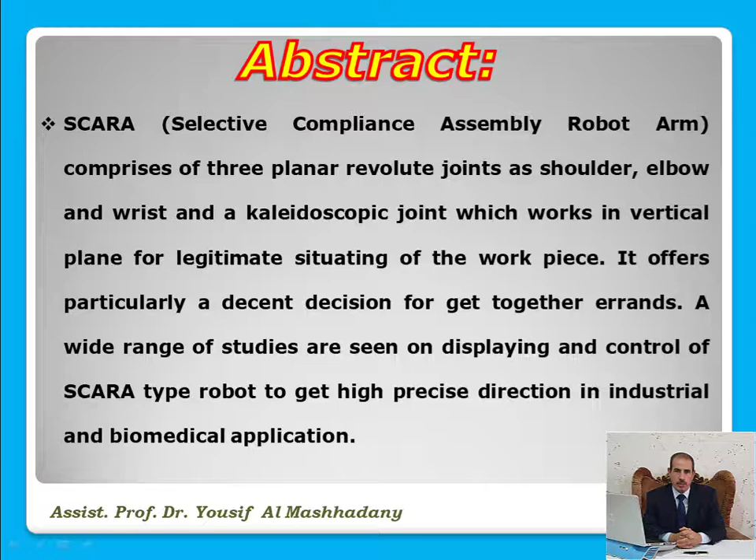The wrist joint works with the gripper in a vertical plane. And this robot has many applications in industrial and biomedical applications. In this work, we apply the linear quadratic Gaussian controller model for controlling the trajectory of the robot.

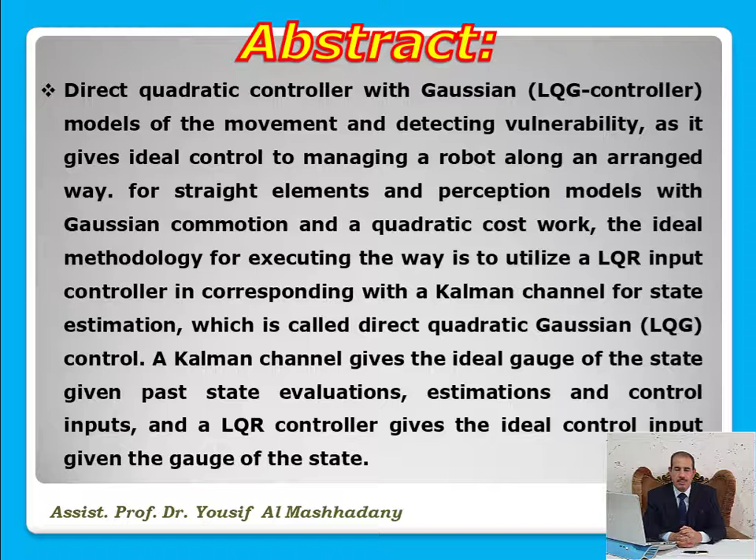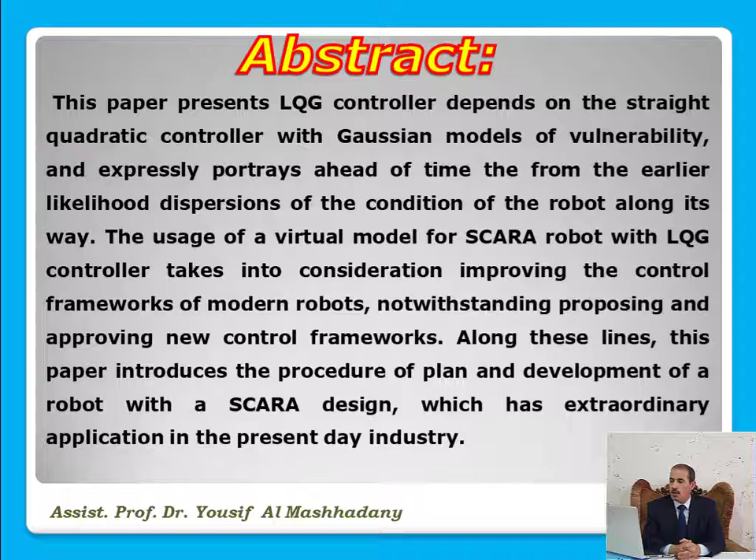This paper used the virtual reality model for the SCARA robot, and this model was built according to the real parameter settings for the robot, such as the speed of the robot, the dimensions of the main robot, and like that. The test of the simulation got high accuracy results with specific real limitations. Therefore, this design has the reliability to implement the robot as a practical robot with different applications.

A basic principle of linear quadratic Gaussian optimal control: we know the linear dynamic system can be described by a mathematical model. The mathematical model for any physical system is very important for preparing the control system, because the first step for building the practical controller is the mathematical model for simulation. Therefore, the linear quadratic Gaussian theory depends on the state space mathematical model.

The state space mathematical model depends on two equations. The first one is the state equation. The second is the output equation. We know this system has four main matrices. The A matrix is the characteristic matrix, B matrix is the input matrix, C matrix is the output matrix, and D is the matrix for the MIMO system. Also, linear quadratic control is prepared for the control signal U.

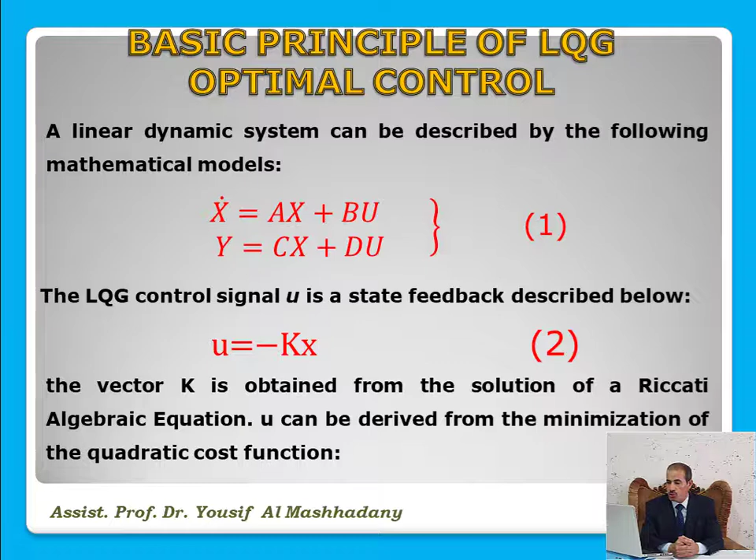This is described by the equation U equals minus Kx. X is the state of the system; the number of states equals the order of the system. K is the state feedback gain. This matrix is calculated in an accurate form to minimize the quadratic cost function. The weight matrix, the general quadratic cost function, can be described by equation 3.

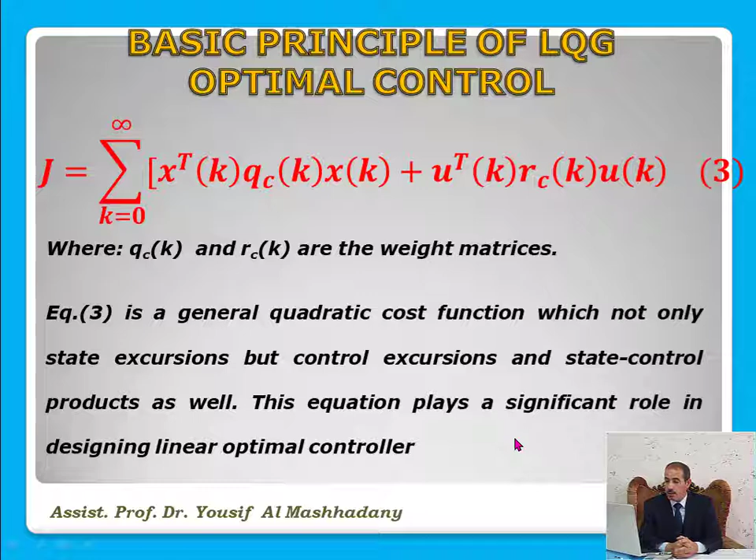This equation is the main equation for preparing the control signal for the robot. Therefore, it consists of the summation of the K matrix. This K matrix is the state feedback gain matrix with state, with input and with the disturbance input, and collects all information for the optimal controller.

The configuration of the linear quadratic Gaussian system consists of two main parts. The first part is the linear quadratic Gaussian controller. This B matrix, K sub G, the Kalman gain. This gain is very important for controlling to get the optimal result with the steady state, and this term prepares the state feedback gain matrix with the main A matrix, the characteristic matrix, and after the combination we get the U signal. This is the output of the controller to send this signal to the robot.

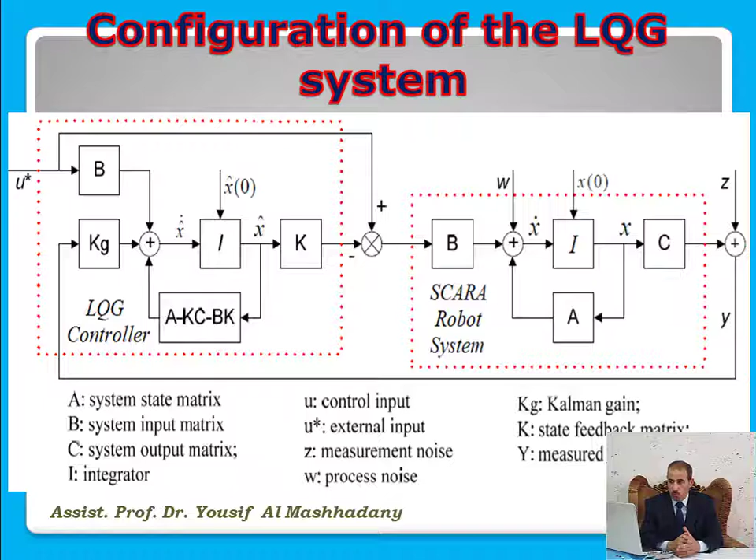The second part of the system is the SCARA robot system. This robot, we know, is described by a mathematical model, a set of differential equations, and we will use the kinematics equations and the dynamic equations to describe the trajectory of the robot.

This slide describes the SCARA robot form. The structure of the robot: a base and three main joints. The first, the shoulder joint, rotates 360 degrees, and the second joint, the elbow joint, like the shoulder joint, rotates 360 degrees, and the third joint has vertical movement, and we can adjust this length to suit the application.

And the fourth joint is for the gripper, and this joint in a practical system is described by sensor-integrated grippers and an ultrasonic sensor for capturing things. Also, this gripper can use capacitive and inductive proximity sensors, and also a force-torque sensor. All these sensors can be used in the gripper according to the application. We can also use the vacuum gripper, which is very important in many applications.

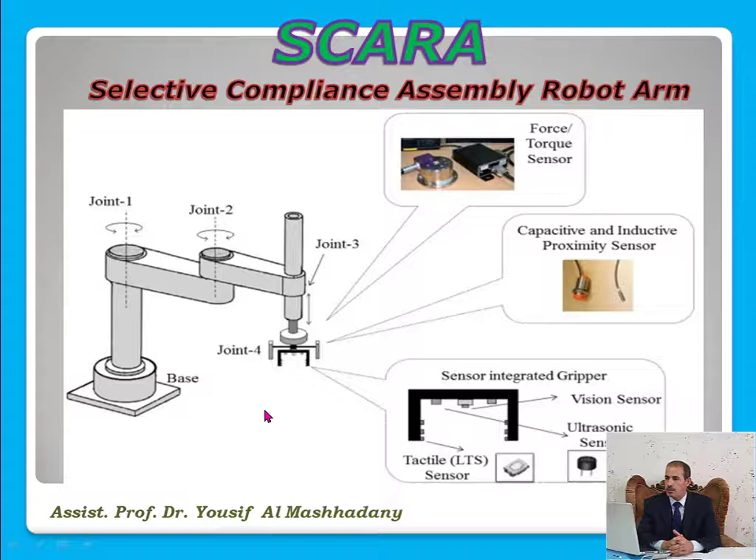Now I'll explain the robot kinematics. We know the DH parameters; these parameters describe the kinematics and how to solve the inverse kinematics to get the joint angles that put the robot in the final posture to arrive at the target with the optimal trajectory. In this structure, we have four main joints, and we have four thetas. One is 0 because this vertical joint doesn't rotate, therefore no angle, but it has displacement. This angle and displacement, because this is for the gripper and this for the shoulder joint and elbow joint.

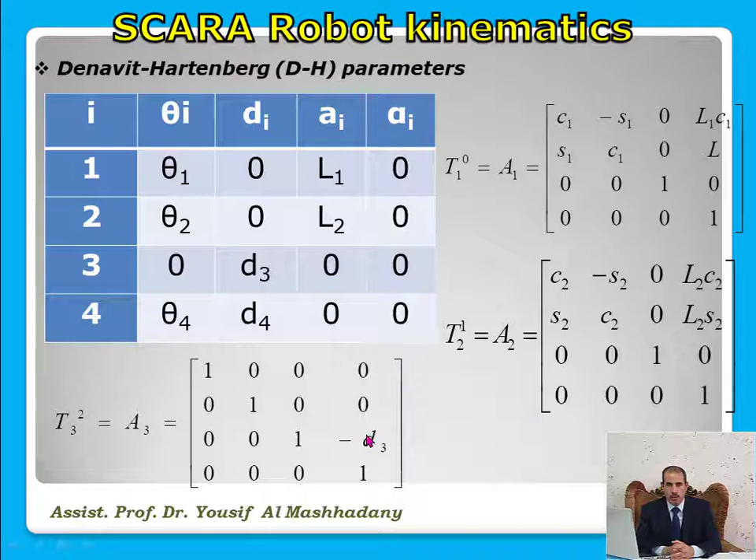This L is the length of the forearm of the joint. Therefore, the transformation matrix from 1 to 0 is A1 for the shoulder joint, consisting of this according to the Euler form, then the second joint, and this for the third. This is just for the parameter D3, and from 4 to 0 is the combination with L and D3 and D4, L1 and L2, and all this.

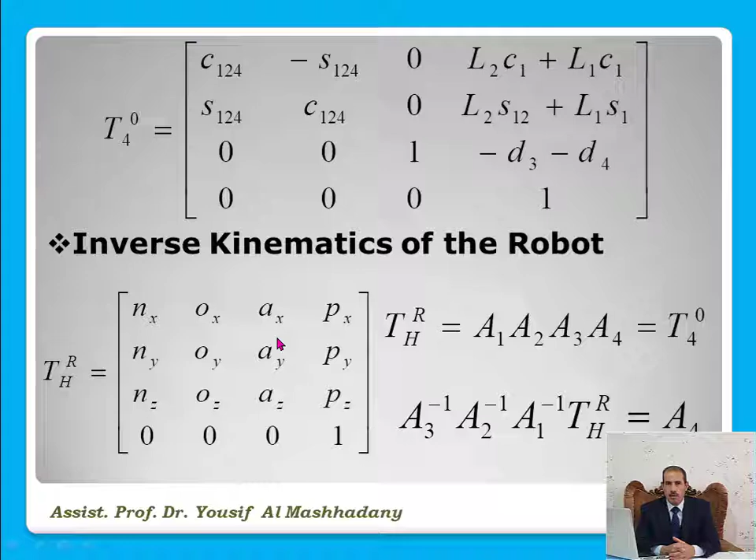The inverse kinematics solution for this robot is by serial multiplication of the transformation matrices A1 to A4 to get the overall transformation matrix to the 0 position. Then when I need the transformation matrix for the end effector, we can get it by taking the inverse matrix of the first three joints multiplied by the transformation matrix from H to R to get the transformation matrix A4. This is for the target position X, Y, Z.

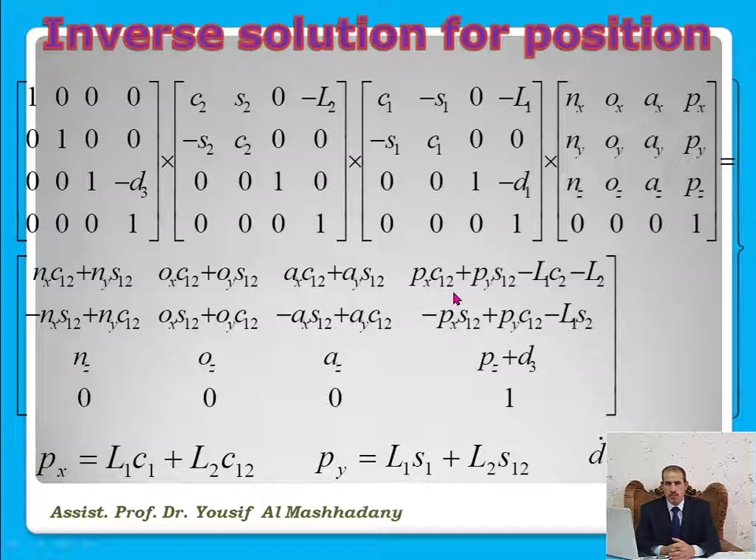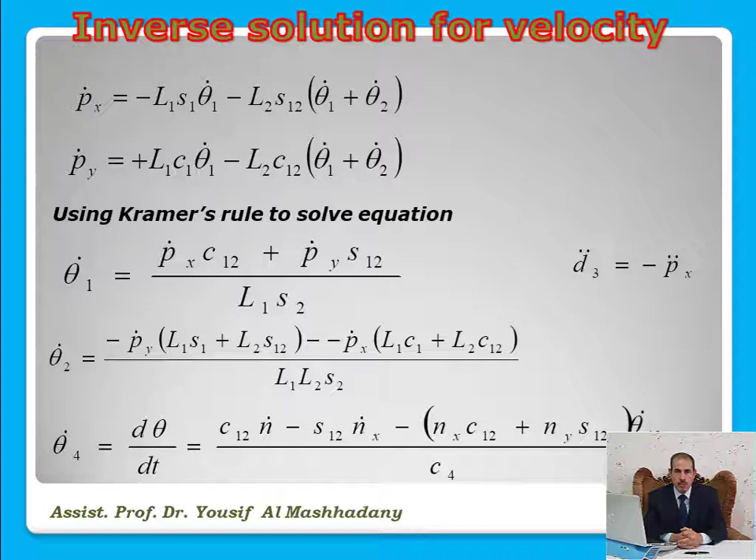Now, by solving the matrix operation, we can get the final form of theta 1, theta 2, D3, and theta 4. Now we solve the velocity. This is used for the velocity equation, using Cramer's rule for solving, and by using this equation we can make a simulation by preparing suitable instructions for the joints and implement the optimal trajectory according to the performance index of the linear quadratic form.

The design of the application of the SCARA robot in this paper is by a virtual reality model. The virtual reality environment is design software within MATLAB to get 3D models for applications. We used this environment to build this SCARA robot lab, because it can do all the applications for the MATLAB movement of the SCARA robot, and many applications. Just change the environment, or make a biomedical application or an industrial application.

Now this is an industrial environment, used for control of factory products, because this is for serial products. We select the damaged product and transfer it to another path. This is the main path of the factory product, and the SCARA robot will get the order to select the limited sample, because this sample is damaged, not a correct product sample. Therefore, it will transfer it to this. This summarizes the jobs done by this robot.

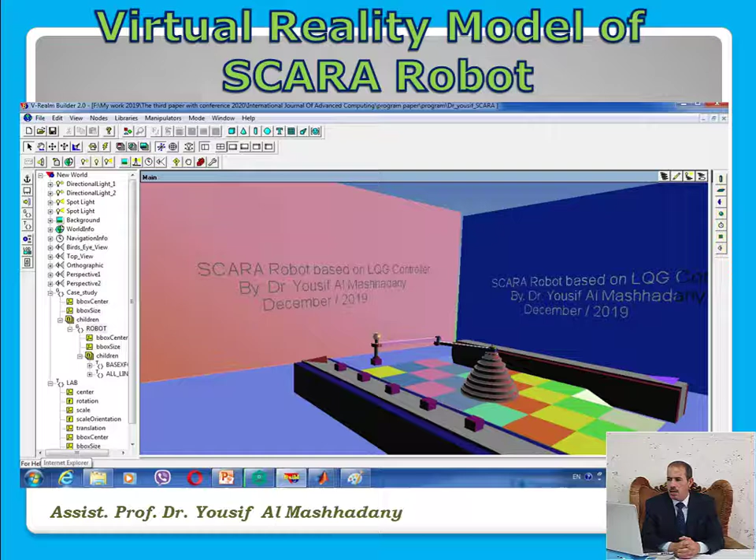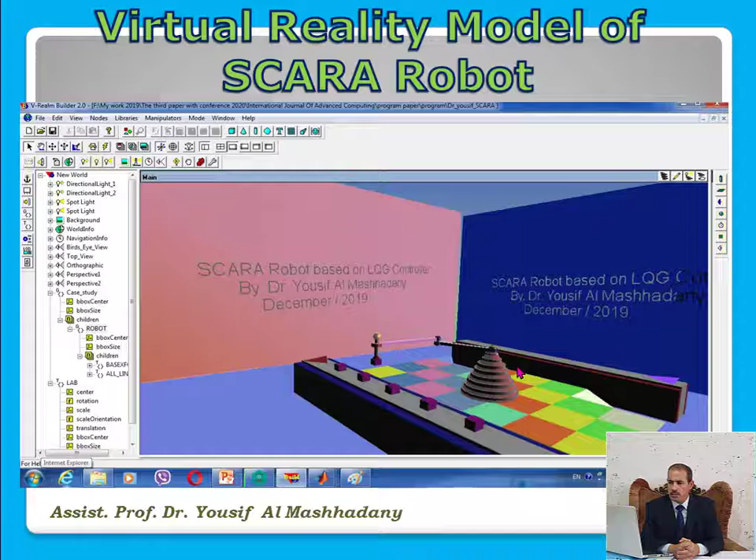This design is built according to the main physical quantities of the SCARA robot: the dimensions, the velocity, the weight; all the parameters are real and practical. The design has three main steps. The first step is the design of the environment lab. By the environment, I mean the envelope of the robot. In this envelope, we have two paths. The first path is the product path, and the second is the path for the damaged product. The robot will transfer the product from this path to this.

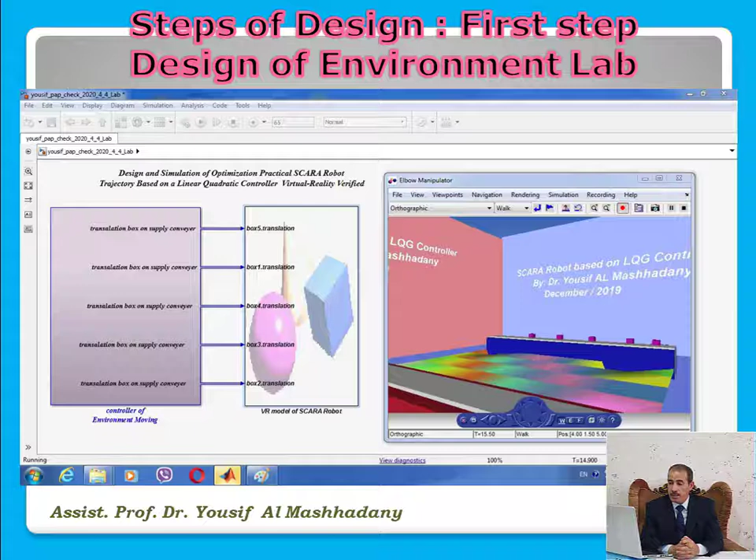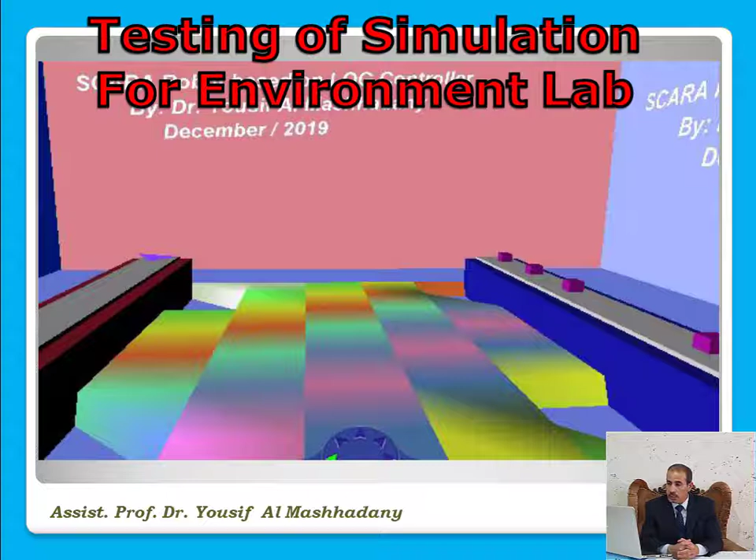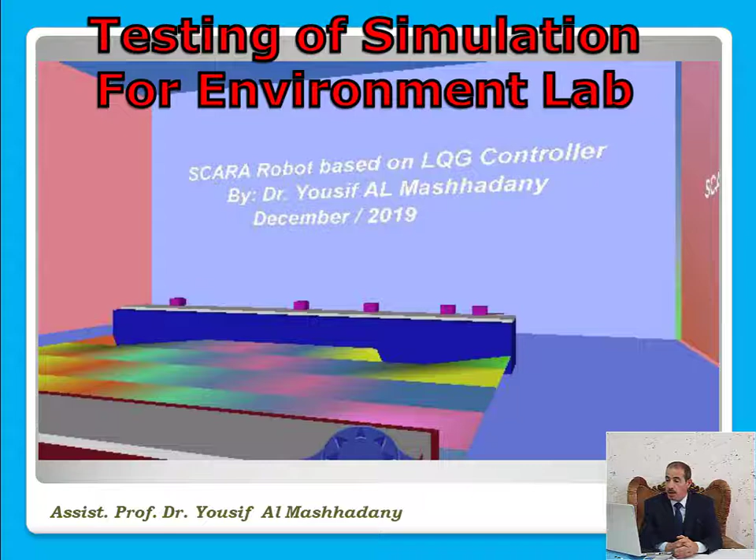First, I made this design in virtual reality, and then tested the simulation of the environment lab to show the movement of the product along this path. We see the product transferring from this side to this side. The main job of the robot is to select the damaged sample from this side to this side by the instruction it gets from the controller, such as a microprocessor, microcontroller or PLC, according to the technique used by the application. Often a microcontroller or PLC is used to implement this application.

After that, the second step is the design of the SCARA robot and preparing the environment for the design of the robot. The robot consists of the base with this form, then the first joint, the shoulder joint, and the elbow joint, and then the third joint and the gripper.

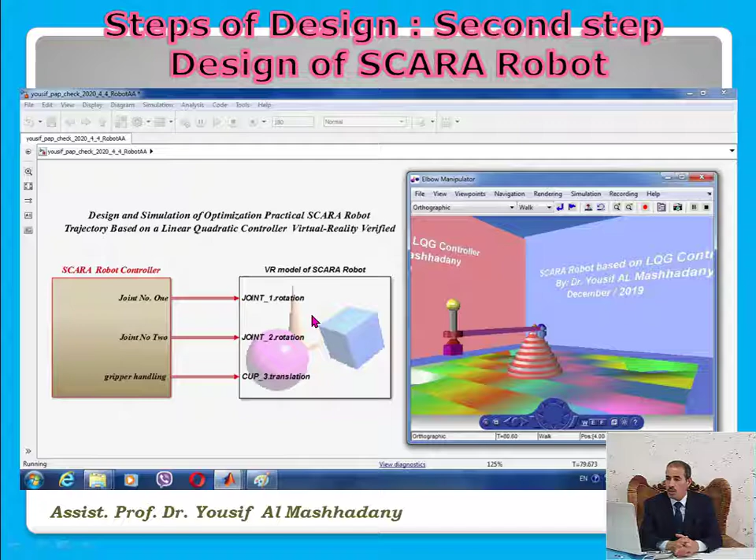This is designed in virtual reality, and the control is designed using a linear quadratic controller to get the optimal trajectory, and the order is calculated here and transferred to the robot. And now we'll make the test simulation. This is the environment called by Simulink, and the instruction is prepared by Simulink and transferred to this form. This explains the

trajectory of the robot. Now this general trajectory is moving 360 degrees. This is the rotation, and the second joint is the rotation, and the third joint has vertical movement, and the gripper is for capturing and releasing the damaged product.

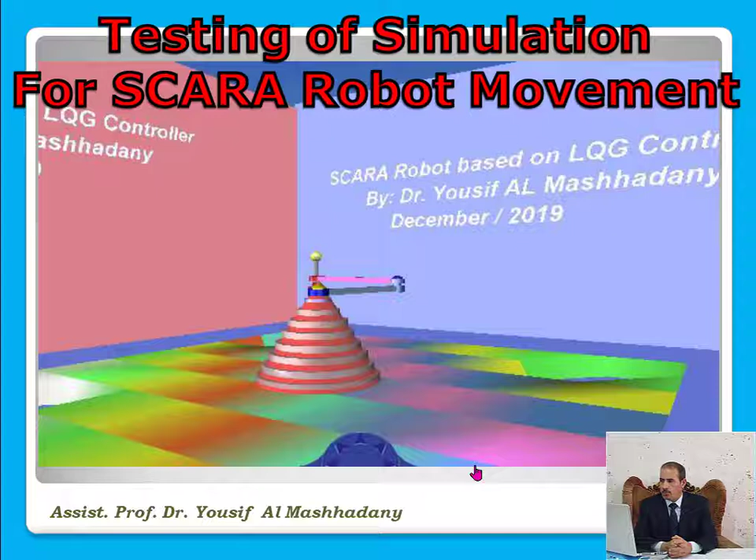This is the top view of the movement of the robot, and we make control for the speed of the robot. The main target is that the accuracy of the robot is very high, and we see this in the final form of the trajectory.

This is with many views. I made the design with 5 views: orthographic view, top view, left side view, front view, and right side view, to describe the model in 3D form with optimal configuration.

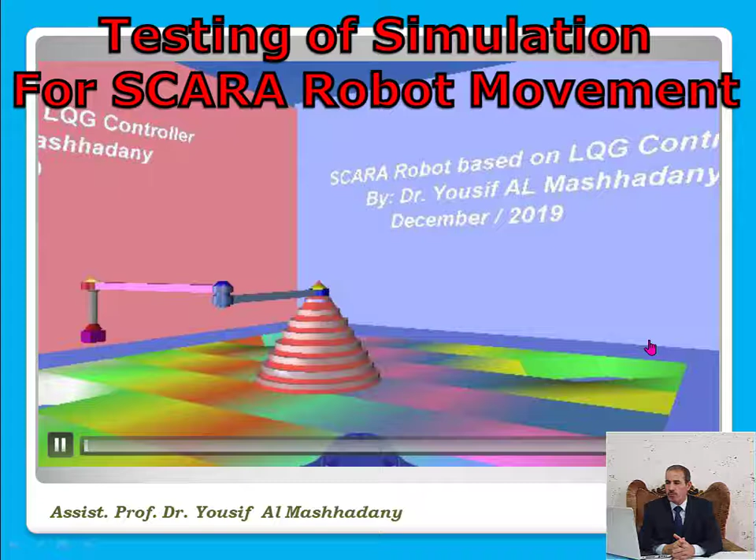Now the final step for the design is the overall design. This is the overall design of the SCARA robot system based on a linear quadratic controller. This is for preparing the environment for the two paths, and this is for the design of the robot using a linear quadratic Gaussian controller to get the optimal trajectory.

After preparing the instructions for the robot, we get three main outputs. The first one is for the shoulder joint, the second for the elbow joint, and this for the third joint and the gripper at the same time. And now we added one item to the environment, the selected box. This is the damaged product, and this is the fine transferred product.

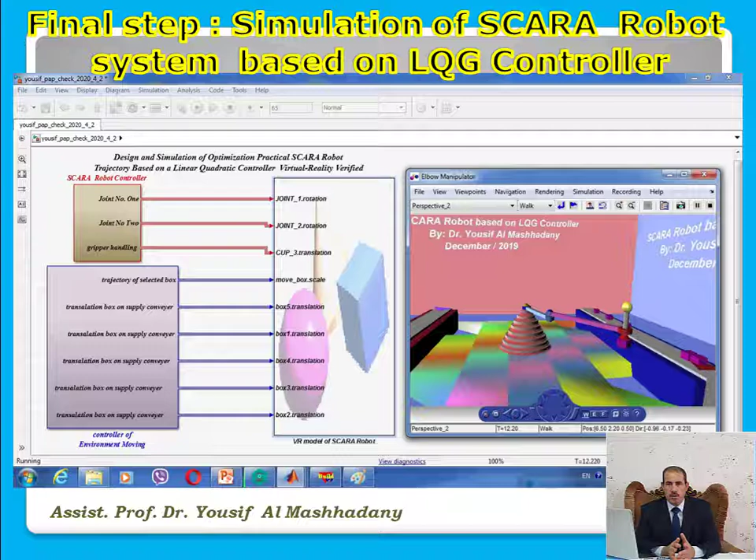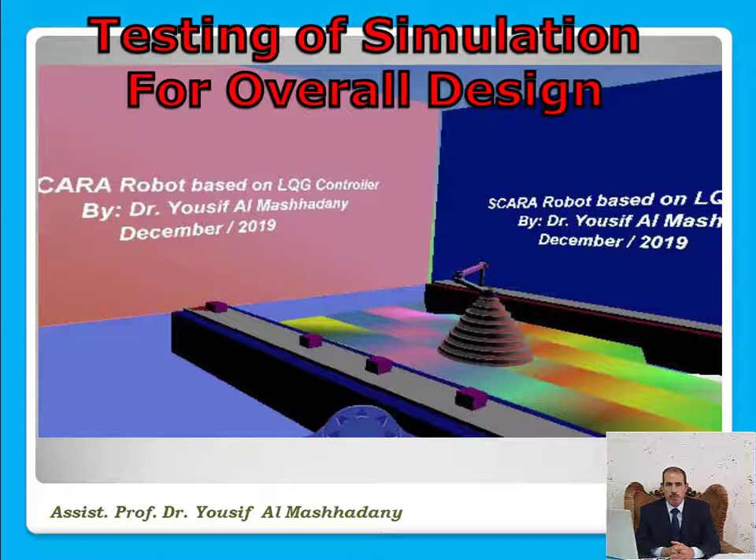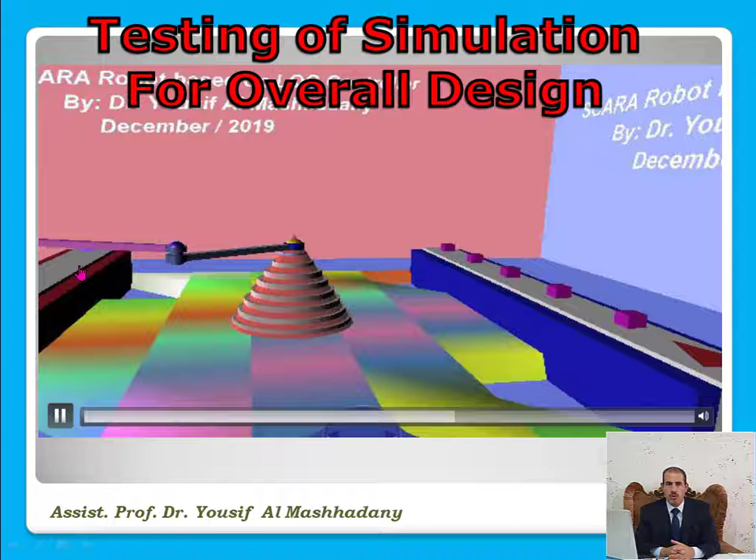And now we can test this environment using MATLAB Simulink. I used MATLAB version 2019b. This is the call of the model from the virtual reality environment using MATLAB to make the test. Now this robot selects the damaged product, this, and transfers it to the second path. This is the top view for selection.

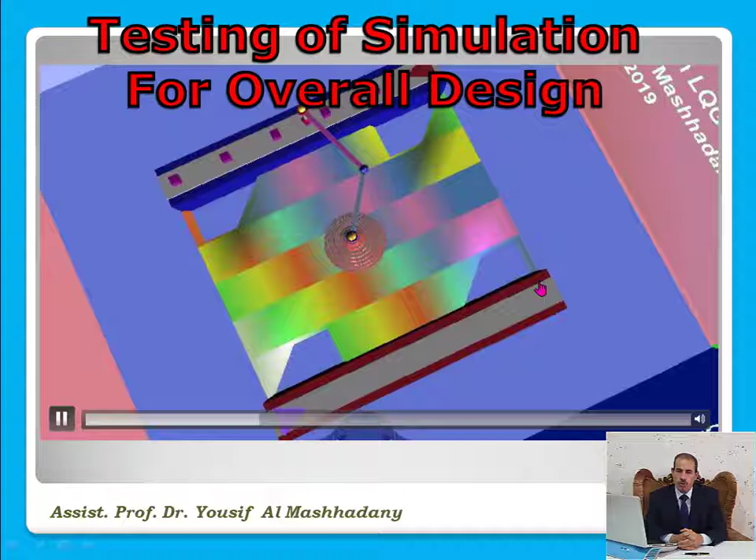We can see the optimal trajectory and very accurate design for the SCARA robot, and I can implement this design in any environment, such as a biomedical environment or industrial environment, and also can modify this control with another form. I will explain this in the conclusion.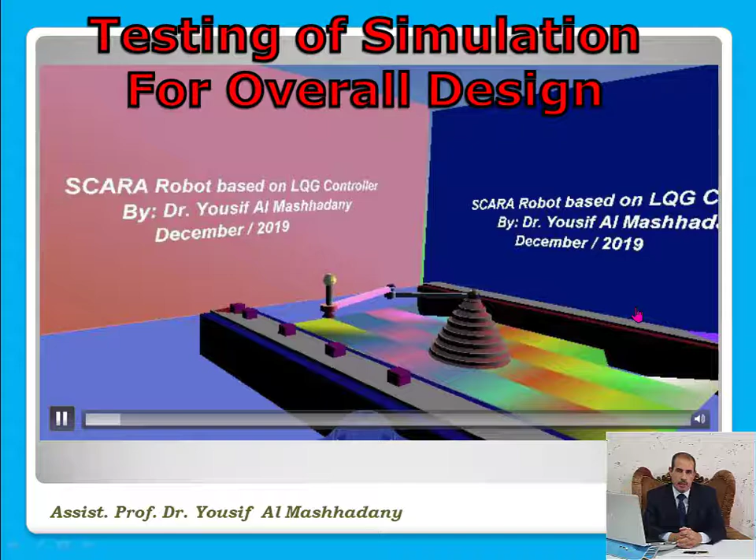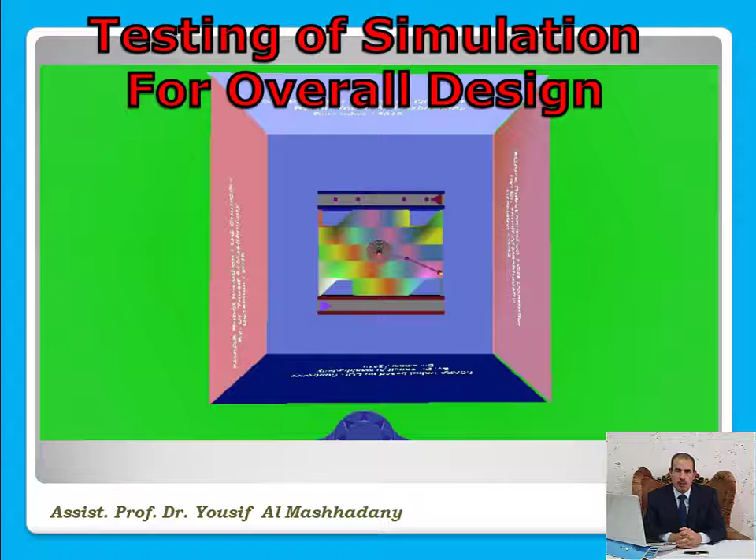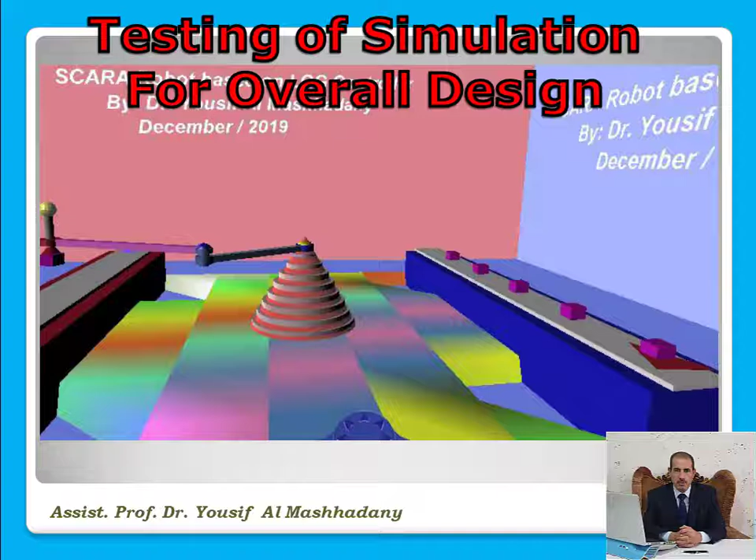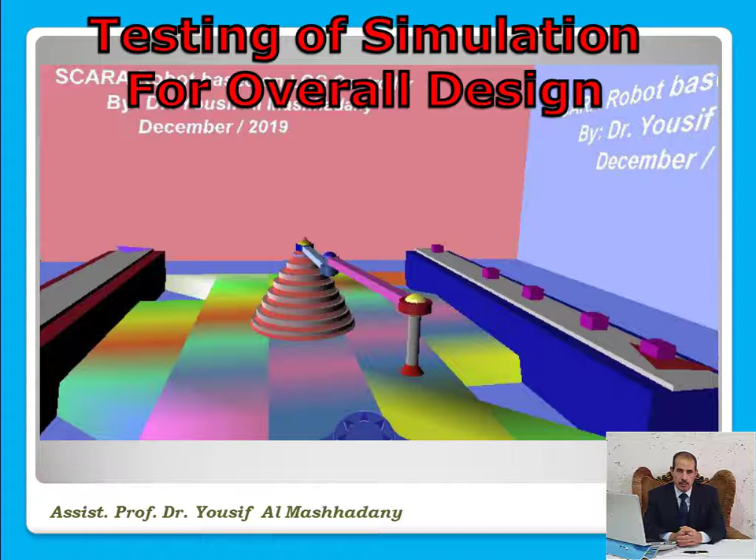Also, we can see the high accuracy in selecting, waiting for the second order, and transferring the sample with high accuracy, because applications such as industrial or biomedical applications need a very accurate design. By this work, I get high accuracy for the design, and we can implement it as a practical model.

Finally, the conclusion for this work: using the linear quadratic Gaussian controller gives a very accurate result, and we can get an optimal trajectory, and this optimal trajectory can be used with industrial robot applications, biomedical applications, or any type of application we need.

Also, the test results have suitable speed, suitable estimation of location, and an optimal control law, because the output has acceptable values for the time response in steady state and transient, because in the classical control tests, such as maximum overshoot, settling time and rise time, these are very acceptable values.

Therefore, we can consider this design a reliable design and implement it as a practical design. I can make cooperation with any researcher working in this field, or any university that needs to implement this design as a lab or practical implementation, because this design can be used in the study of robots, such as a mechatronics lab, robotics lab, or industrial application lab.